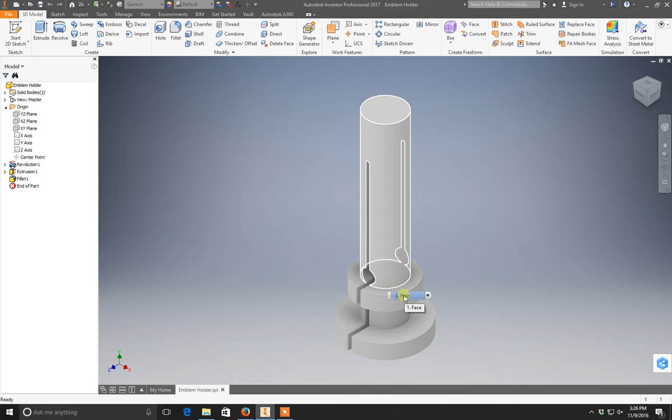Hello everybody. Today I'm going to be going over the basics of making an engineering drawing, or a DWG. And we're going to be drawing this emblem holder again.

The first thing you'll want to do is have this file open. Open the emblem holder file. If you have not drawn it yet, I have other videos demonstrating how to draw this, so get this drawn first.

To make a drawing, there are several ways. You can click on File and find New, or click on New right here to bring it up. Another way is from the main menu, you can click on Drawing. However, when you click on Drawing from the main menu, it does not bring up the option to do the OC Tanner template that I made.

So bring up this menu right here. You can click on OC Tanner template. This is a template that I've made myself, and it still needs some work to be completely done.

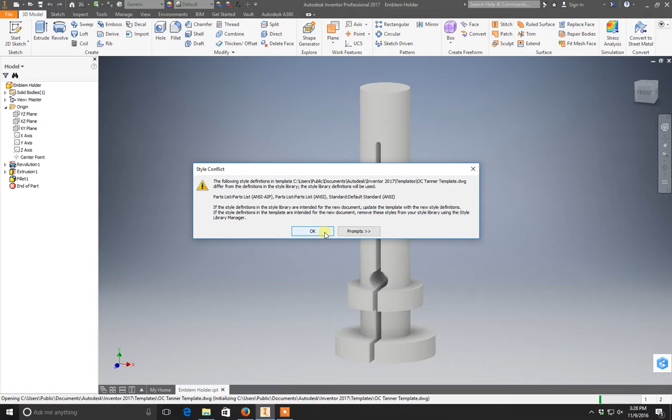Start by entering a quantity. We don't know the quantity right now, so you can just say 1 for now. I think that's fine, it's just saying it's using things from previous versions of Inventor.

So we have this paper right here. For drawing this, we'll just start by inserting our part. If I have this part open, it's going to automatically assume you want me to make a drawing of this part, and that's usually correct. If not, you search through your directory until you find the part you want to draw.

So I have my base view here. I just clicked, I didn't even have to click to start that, and then I click up here for a view over here. I could also make an auxiliary view here, but for this drawing, these two views are adequate. So I'll say OK.

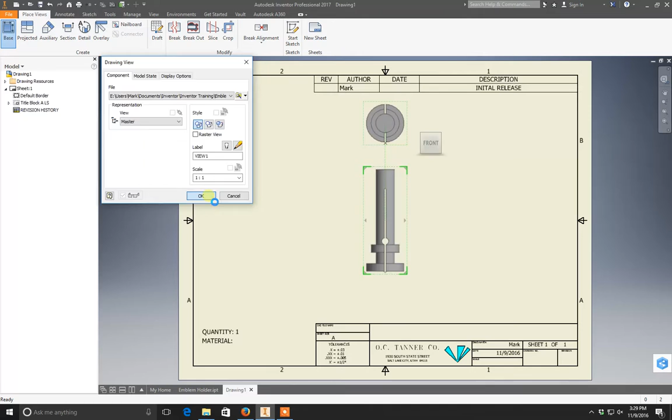As you can see, you can move these around like this. This bottom one is the base or the master drawing. As I move this, the top moves with it, and the top I am unable to move side to side, I can only move it up and down. So you're forced to keep the correct orientation.

For this part, it makes more sense to have a portrait drawing instead of a landscape drawing. The way I have the template set up, you have emblem holder, drawing resources, and sheet 1 over here. So I'll expand sheet 1 and delete title block A.

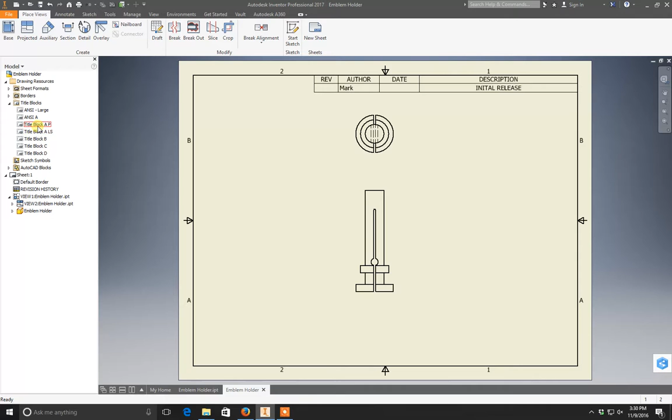Then I'll expand drawing resources, expand title blocks, and here are the custom title blocks that I've made. I'm going to click on title block AP, that's for portrait, double click on that, enter a quantity of 1 again, and this brings in the portrait title block.

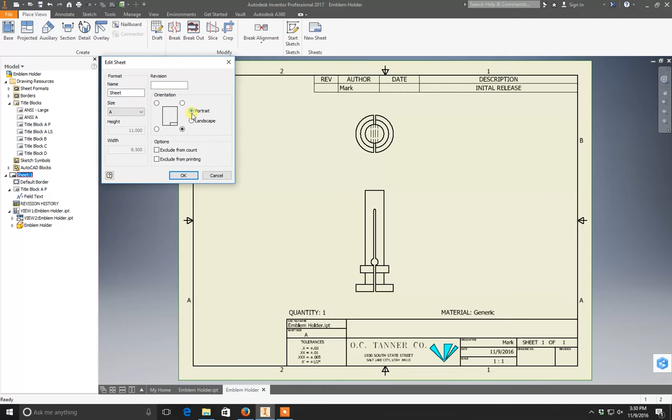The second thing I need to do is right click on sheet, click edit sheet, and this brings up the initial menu that we had when we first placed the part. Right here is where we can change what size we want it to be. We want an A size sheet, and we want to make it a portrait drawing. So I do that and say OK, and now it's portrait.

I need to move my revision bar around to wherever is appropriate, usually to the top right corner.

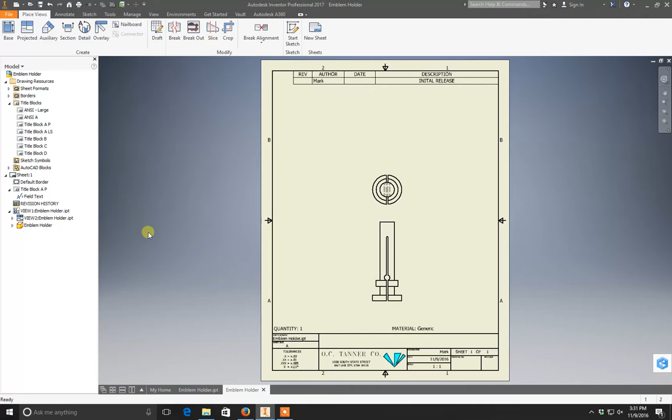Right now this is an actual size drawing. I want that drawing to be a little bit bigger, so I right click here and say edit view, and I'm going to make this a 2:1 instead of a 1:1. As I update the base one, the slave is also updated.

Let's check my time real quick. We're doing alright. This might have to be a 2-part demonstration.

So alright, I've got my basic layout of how I want it. Now I'm going to start annotating. There's two ways to annotate, and we're going to do it both ways.

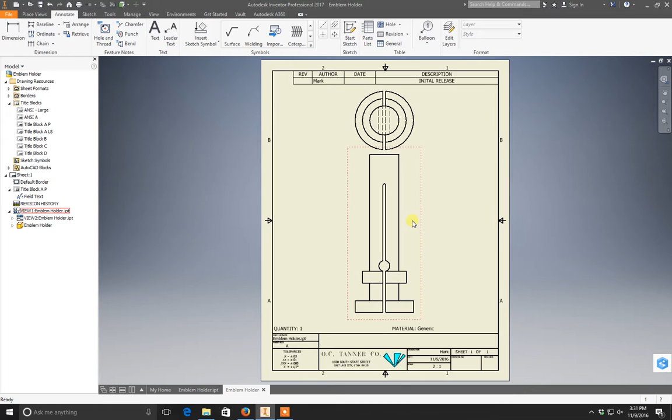I'm going to right click here and say retrieve dimensions, and now I can click on which of these things I want to retrieve the dimensions of. This was my first revolution, so I'll click on here. It brings out those dimensions that it showed on sketch 1, and I'll go back and show those later. Then I'll click on this one too, and those are from the second sketch. Then I click on select dimensions, so now I've imported all these dimensions.

Now I have to click on the ones I actually want to keep. I think I'll keep that one and these three, and I'll keep this one. I'm not going to keep these ones, just because I'd rather put those dimensions up here, but I will keep this one here. That looks good for now, so I'll say OK.

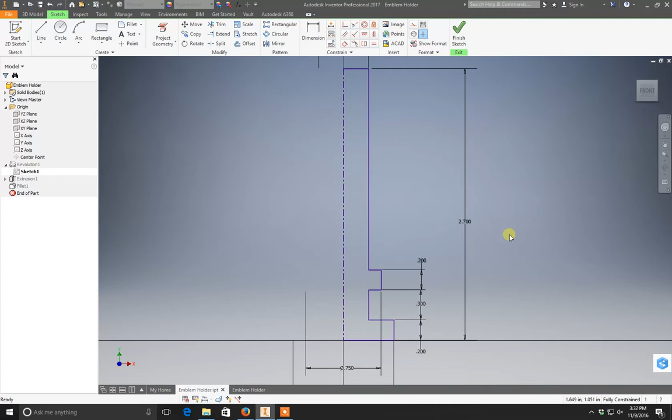Now, as you can see, only those dimensions were kept. Going back to Emblem Holder, if I was to go back and look at my original sketches, it brought in everything as I drew it on my original sketch for part 1, and for the next one where I made the slit, it brought in those dimensions the same way as well.

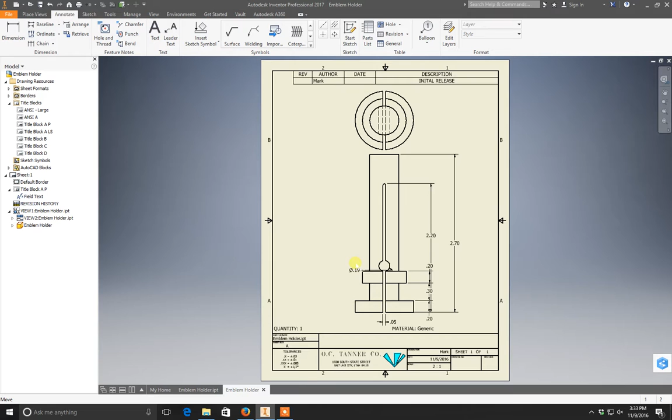So first we're going to arrange these in a way that is more pleasing. Have to fiddle around with them a little bit. Sometimes you need to click on the points to move them, sometimes you click on the actual number.

Going to move this one over to this side, and now you'll see this center line right here. If you drag it to that center line, it just means you have the dimension centered in it. It's going to look better. Same here.

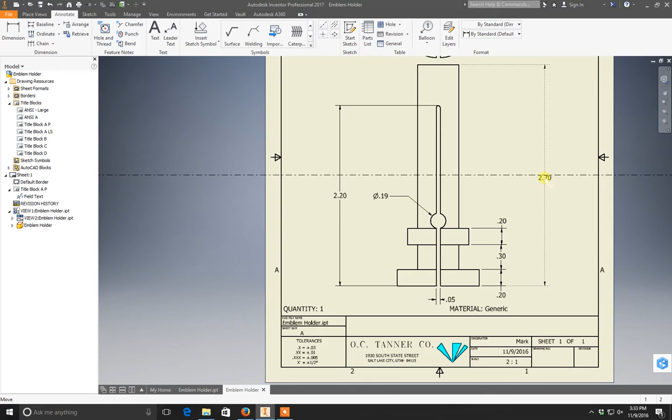That looks good there. Okay, now I'm going to click dimension, and I'm going to dimension these circles. So I'll click on the outer one. Before I click again, I'm going to right click and go to dimension type and change it to diameter.

Okay, and then I'll do the same to these ones. Right click and diameter, and one more time. Oh, and it already assumed that one was a diameter because there's no slits in it, so it likes to default to diameter. Although now I messed something up. And there we are, okay, good.

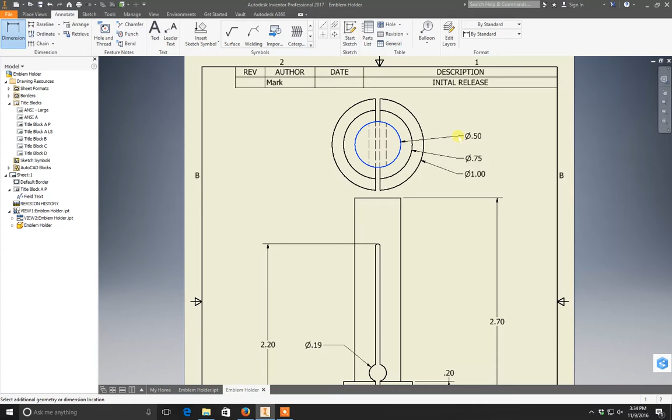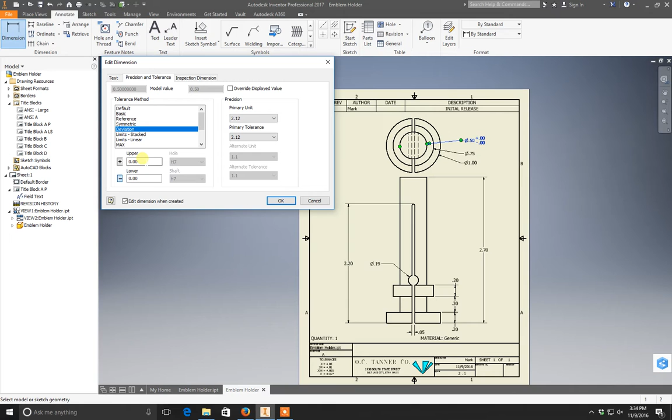And that dialog box that pulls up is just the same as this one, and this is where I can change how many units do I want to show, do I want to have a plus or minus dimension. So I can click on symmetric and make it plus or minus something, or plus something minus something else, just whatever kind of dimension you want to place.

Looking at this, let's see here, we're still lacking a dimension here and there. We'll put a radius on that fillet there. Okay. And I believe that's it. We need a height on this mark right here.

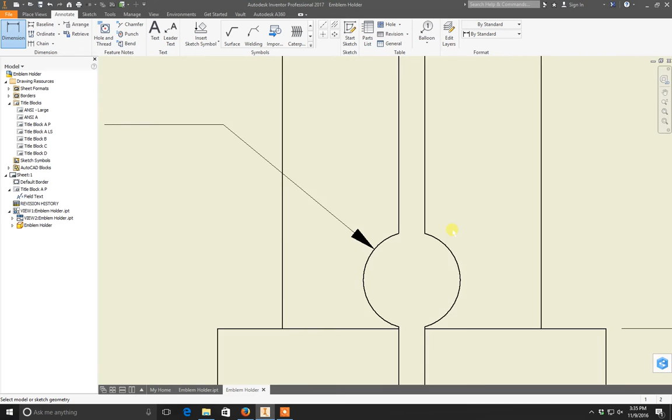So we could do a call out just saying, hey, we want this to actually be tangent there, but it's probably better if we just say what the height of it is.

So to do that, first I'll right click on that drawing, and I want to automate center lines. It asks which center lines do you want to show. I want hole features - that's not a hole feature, since we didn't use a hole, we actually just extrude a circle, so that is a cylindrical feature. We need to make sure the cylindrical feature is checked, and then we say OK.

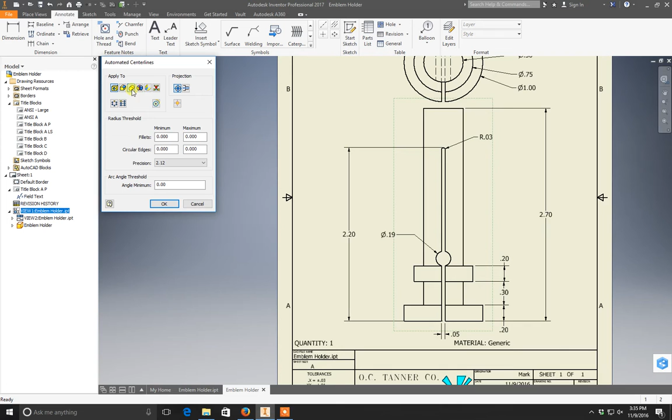And of course that's not going to work right now. Let me try that again. Cylindrical feature, revolve features - let's just, well, we don't want to do fillets, let's just check all of these. See if that works, and if it doesn't work, I'm angry. Okay, well, it didn't work.

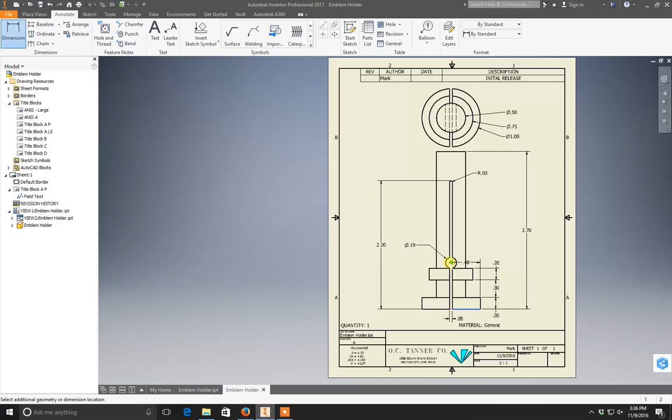We'll see if we can put a dimension on it anyway. So from here to here, let's try it again. From here to here. Okay, we can still pick up the center point right there, and we'll just place the center point like that.

I think I'd like that to have three decimal places. I think that's it - maybe let's give this one 3 decimal places. I'll double click here and change that to 3, and I'll change this one as well.

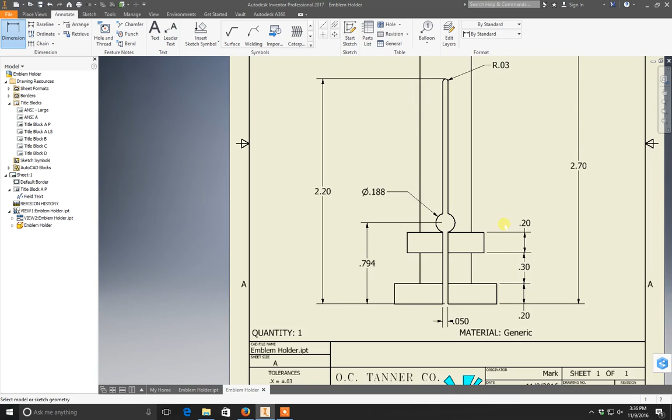Alrighty, and then I will start another video to finish this one off. So we'll stop.